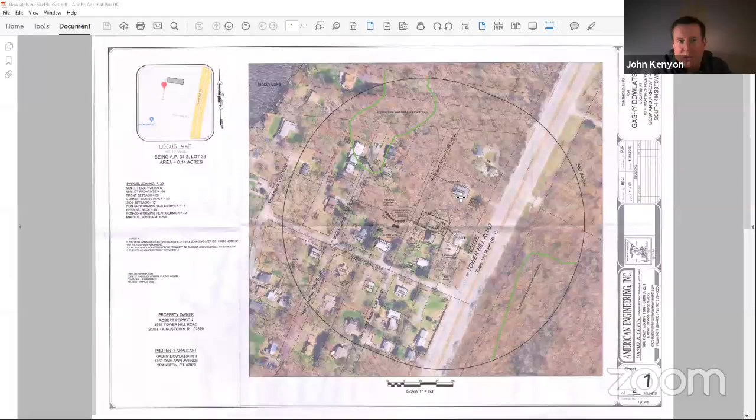The applicant's property is located on Bow and Arrow Trail North, designated as Tax Assessors Plat 34-2, Lot 33. The property is 6,050 square feet in size, and it's in the R20 zoning district. The applicant is proposing a 2-bedroom, single-family residence with an 896 square foot footprint. The proposed house meets all setback requirements and no dimensional relief is required. The house will be serviced by a proposed OWTS that has been approved by RIDEM. There are no wetlands on the property, but some are located to the northwest of the lot. The wetlands have been flagged by NRS, and the proposed OWTS will be located to the rear of the property, approximately 115 feet from the wetland edge.

We're here tonight for a recommendation under section 504.1 of the zoning ordinance, as the OWTS is within 150 feet of the wetland and requires a special use permit. The proposal meets all requirements under section 504, including the lot coverage requirement of 15%, and the drainage has been designed for the 25-year storm. Patrick Freeman from American Engineering is here tonight. He prepared the plans, and I'm going to have him go over the existing conditions and the proposed OWTS.

Thank you, John. Mr. Freeman is just coming in.

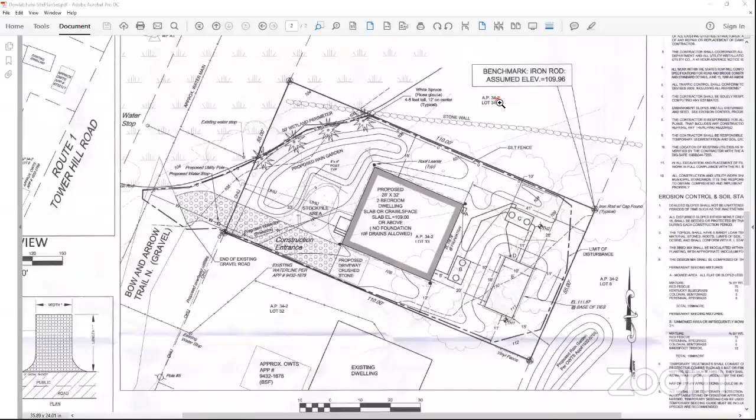Speaking of the trail again, I would mention that the existing water stop that you can't use is because it's a private road and they would have had to get a permit signed by the owner of the road in order to dig in that area. So I believe that's why you had to move your water stop. Is that correct? No, that's part of the reason. Being in the wetlands is also a factor, connecting to that would have been an encroachment into that 50-foot perimeter. Yeah, so it's also back on that.

It's also our understanding that the rain garden, although it needs to be planted according to spec, there's no requirement to maintain it, other than the honor system to maintain its health and to see that it continues to function down the road. So that's a concern, but it's apparently nothing that we can do about it or suggest be done about it.

So let me see. The driveway, it says the construction entrance, there's something in the plan that says the length of the construction entrance is governed by soil type, whether it's 50 or 100 feet long. Could somebody explain what that means?

That basically it prevents tracking of dirt or soil onto bow and arrow trail. What it's basically implying is that certain soils track differently, so based on the soils found on site, if you need a longer distance to prevent transport of soils, then you put a longer construction entrance on there. With bow and arrow being a gravel road, it's not as critical because it's basically an extension of a construction entrance. It's a long gravel road, it's not going to show up with silts on pavement per se.

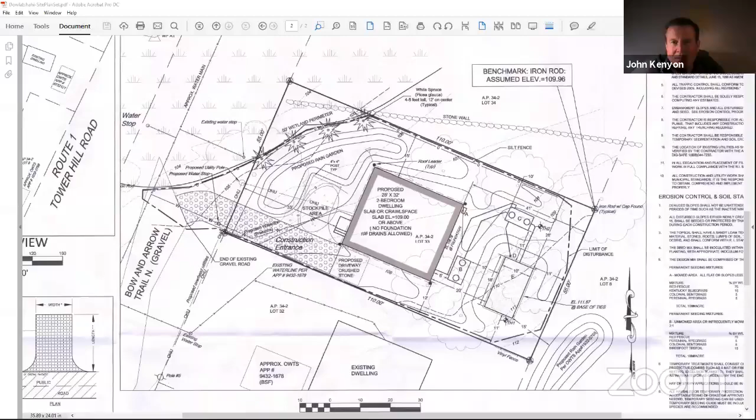The water stop? I'm sorry? Even though it's flooded to the water stop? Well, I'm not sure which water stop we're talking about, the one in the 50-foot perimeter wetland or the one in front of the Bissett's lot. I'd have to double check, I don't have an answer for that. The only thing that we could do is improve the gravel of Bow and Arrow Trail to meet a standard where it won't be a flooding hazard.

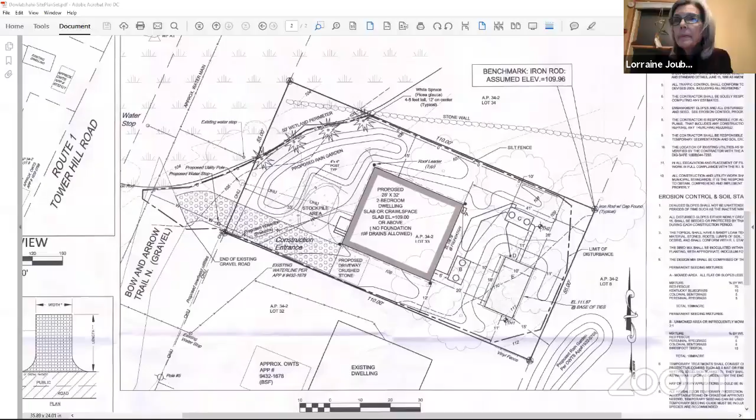Any thoughts? Yeah, John and Jane, does the existing gravel end perpendicularly to the road, or is it almost a diagonal?

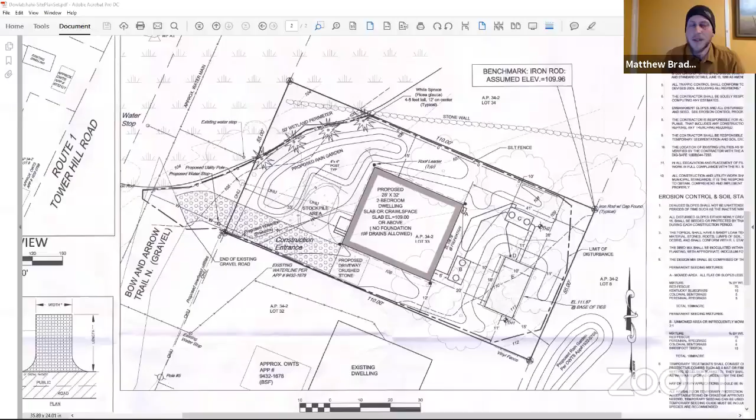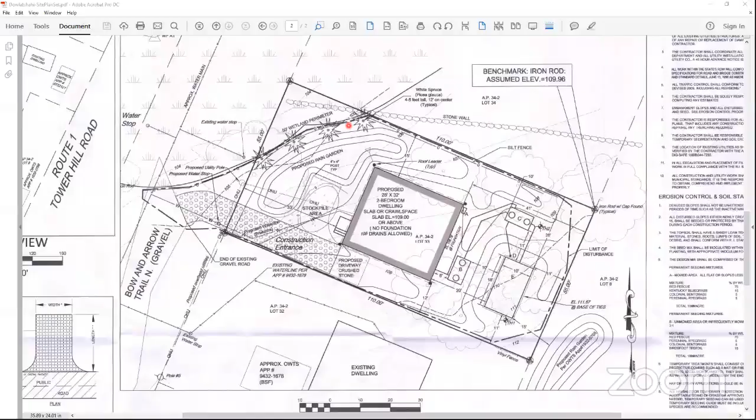It is kind of a diagonal at the water stop. I did send in a couple of pictures to Mr. Parker, titled flooding 1 and flooding 2 or something, for Bow and Arrow Trail North. It pretty much shows what happens.

That's where everybody gets stuck. One fella came down with a box truck because he was following his GPS. It reminded me of a Seinfeld episode—it told him to go straight into the swamp, and that's what he did.

Yeah, he had to be towed out. Like I said, the guy doing the surveying was parked right there and he had to be towed out too, and it wasn't even raining at the time. It just gets really soaked.

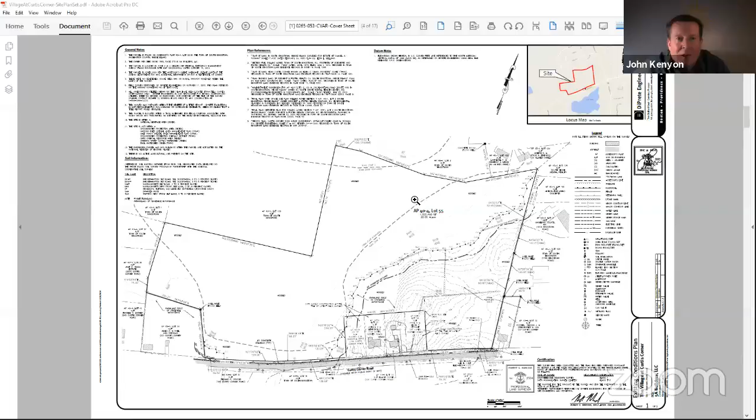The property is just under 30 acres in size, in an R20 zoning district. They filed a comprehensive permit application for the creation of 24 lots, containing 16 single-family dwellings and 8 two-family dwellings. There'd be one affordable unit in each of the 8 two-family dwellings. The concept is for a young couple with a family that could buy the two-family, live in one of the units, and rent the other as affordable.

We appeared before you last year during the master plan stage of review, and you didn't provide a recommendation because at the time you didn't feel there was sufficient information. We did receive master plan approval in March of last year. Under the subdivision process, after receiving master plan approval, we apply to the state for all necessary approvals, and then we have a preliminary plan public hearing with the planning board. We've had one hearing so far.

They requested that we come back to you since we have more detailed engineering along with the landscaping plans. We've also filed for the necessary state approvals. We're very close to receiving those, and not much has changed as far as the design since the master plan.

Eric Prive from DiPrete Engineering is the project engineer. I'm going to have him briefly go over the existing conditions, the changes from the master plan, and where we are with the state permitting. Unfortunately, Eric has to be at another public hearing in another town, so he's going to talk really fast.

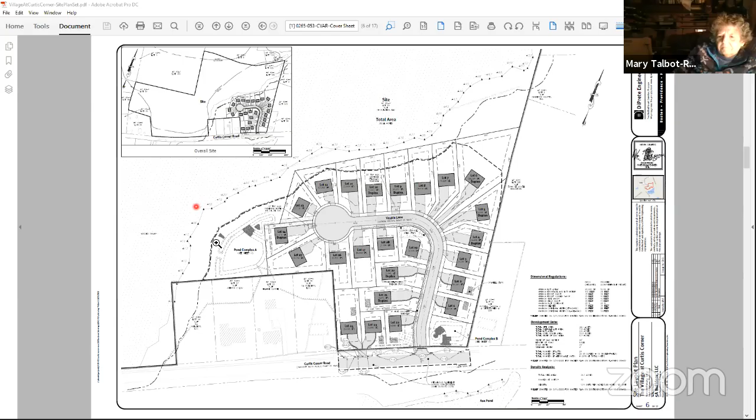I won't go too fast. First of all, can everybody hear me okay? Yep, thank you. Okay, thank you. For the record, Eric Prive, P-R-I-V as in Victor E, a registered professional engineer with DiPrete Engineering.

To give you a quick overview, actually not much has changed from master plan. One of the things we looked at during the public hearing process was an abutter located just to the east who had some concerns about drainage. So we increased this area in the front from the original master plan, which had a smaller area coming to this front area for infiltrating groundwater.

So we were able to shift the units up a little bit, all up to the north here, and create a larger area up here to be able to treat that stormwater.

Also, there's an existing catch basin located right here in Curtis Corner Road, and that catch basin just goes to a flared end that comes into a roadside ditch, with no treatment currently. As part of our development, we take that roadside ditch, but now it overflows and comes in and gets treated within our water quality area. We have a sand filter located right here in the front—a stormwater sand filter, not the bottomless sand filter like the septic system, just the sand filter for stormwater in the front.

So we're actually treating a portion of the roadway that is not currently being treated today; it was just direct discharge into this roadside swale. We also added, because of the abutter's concerns, some dry wells and driveway trenches to really take away the stormwater in this front portion.

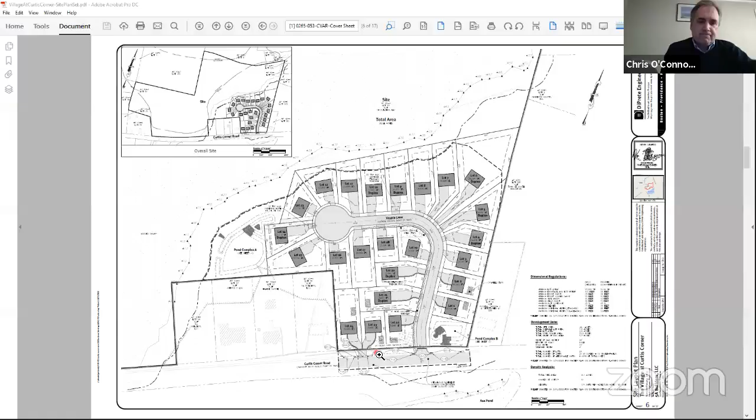Eric, is there a requirement for protection of upland open space in this zoning district? It seems awfully dense for the amount of development on a relatively small area of suitable land. There is not, but because it is a comprehensive permit, we laid these out back at master plan—each lot size and the relief needed. We took the town's comprehensive plan and the underlying densities; this area is known as medium high density, which allows 4.35 per acre.

So that's effectively a 10,000 square foot lot. We took only the upland area, so there's 7.4 acres of upland, and that's what the density was driven off of, staying within the town's comprehensive plan and restructuring it for density purposes. There are some areas for stormwater measures, but we only used the upland area. That's not a requirement of the density, but that's what we used. It'd be difficult to build in the wetland.

My second thought is that there's no indication that any innovative low impact development is occurring in terms of design and the extent of pavement. The driveways are extremely wide. The guidelines are 9 feet wide with a broadening as you approach the house, not immediately. The cul-de-sac doesn't look like it's going to have vegetation in the middle, and that's a pretty large cul-de-sac, though it could be vegetated. There could be shared driveways, particularly lots 24 and 23, where for safety it narrows to one, but it's still two very large, very wide driveways. Lots 20 and 21, many of them, almost all, are excessively wide. There's little effort to reduce impervious cover.

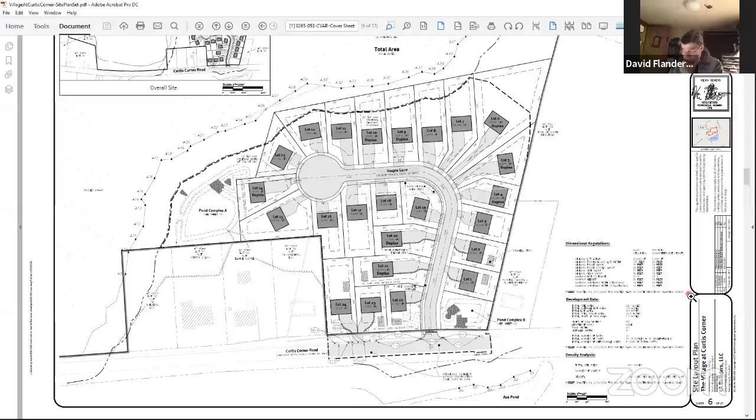So I can try to answer any non-engineering questions, and repeat what Eric said at the many hearings so far on this. Well, John - excuse me, sorry, Vern Wyman. I was just going to comment that the last time we reviewed this project, we were reflecting upon the combination of duplexes and single family occupancies here, and we were concerned with traffic.

I think since that time, from the records, there is a traffic report now. Could you comment on that and the results they got? Sure, Paul Bannon from Beta Engineering prepared and submitted a traffic report. It showed that it would not impact the level of service in the area.

At the last hearing with the planning board, they asked for an update concerning the light at Curtis Corner and 108, and he submitted that, showing it would not impact the level of service of the light there. The other thing the board was concerned about at the master plan hearing was the impact of the town potentially moving the high school to Curtis Corner Middle School, and that was taken into effect on the traffic. Good.

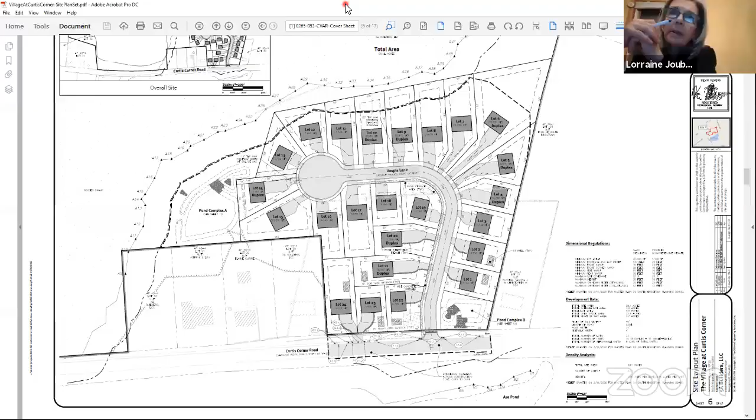Well, I would note that the concept behind this is close to the core of town - there are recreational areas you can walk to. I would agree if we were on the outskirts of town, on a larger parcel, but the town needs affordable housing, and this is one of the few lots in town that works for this type of development. There aren't many left like this. If we start reducing the number of lots, we're reducing the affordable housing, and that's the whole concept with this development.

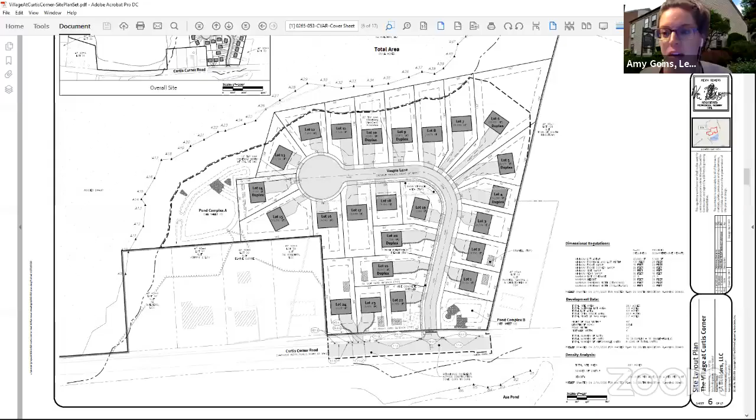This is Amy Goins, may I jump in? Sure. Hi everyone, I'm sorry I haven't met some of you in person - I think this is actually my first Conservation Commission meeting, so I've been listening. I just want to jump in on this question of density: this is an advisory opinion to the planning board, we're at the preliminary plan stage now - that means they're vested for density, right? The density vesting occurs at the master plan stage.

Doesn't mean it's set in stone forever, but it means that the approved density is what will govern going forward, unless the engineering produced at the subsequent plan review stage shows that the land can't support the approved density.

So I would encourage you in your discussion and your recommendation to the planning board to consider that. And if you have recommendations on conditions that will mitigate the impact of the approved vested density, you should certainly feel free to propose those. But I want to caution you against that, and I've provided this advice to the planning board as well. You know, master plan density, that ship has sailed for the most part. Thank you.

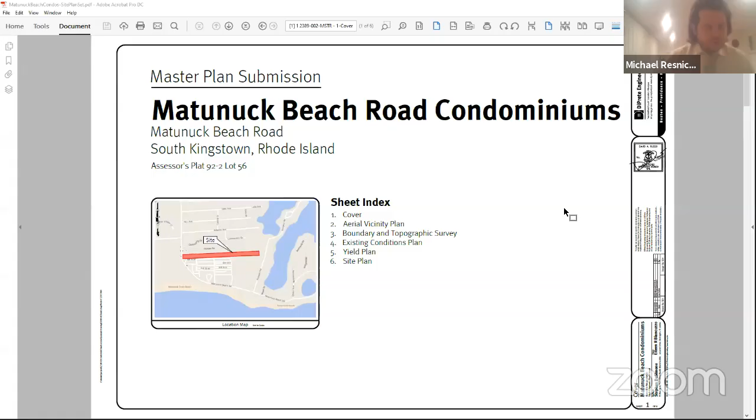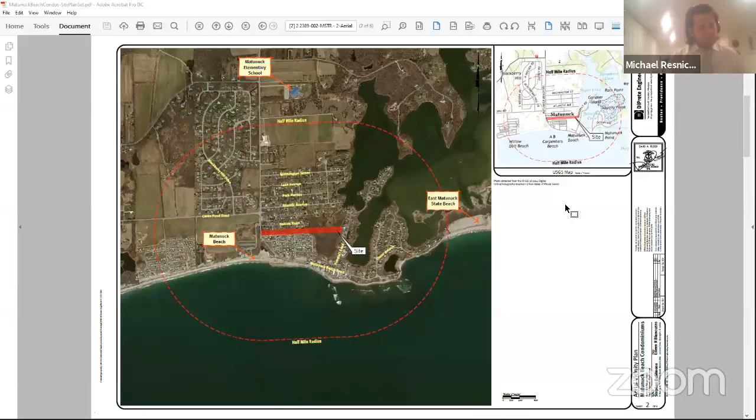The property is located at Matunuck Beach Road, plat 92-2, lot 56. The parcel is 4.77 acres, and it's in a mixed zone, CN and R20. By way of background, we have completed our pre-application concept review before the Planning Board and the Tech Review Committee, and we are presently before the Planning Board on our conceptual master plan review.

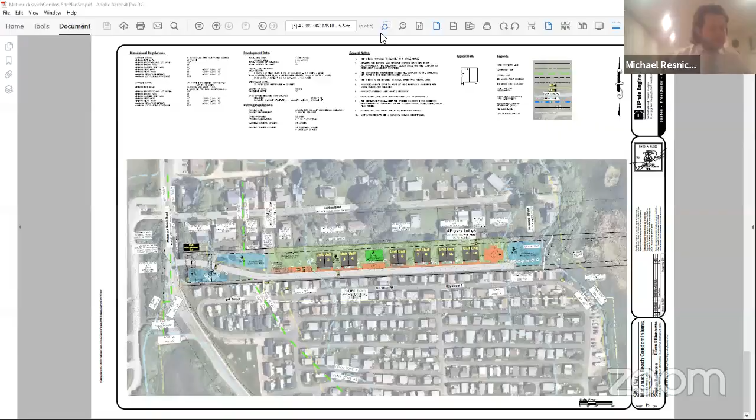We have had two lengthy hearings before the board on this present application. I would estimate anywhere between 7 to 8 hours of public comment, question and answering, and presentation before the board. We are presently scheduled for a meeting before the planning board on January 7th of this week.

As the commission is aware, we still have before us our application for a preliminary plan and also final plan. I would remind the commission that, like the previous applicant and presentation, this is a comprehensive permit pursuant to state law for low-to-moderate income housing. The proposal right now is a 12-unit residential condominium complex in the form of 6 duplex structures, as depicted on the site plan in front of you. Access is proposed via private driveway, with the parcel's lot frontage located on Matunuck Beach Road.

As Mr. Duhamel will discuss with you, we've proposed to manage the stormwater through the installation of various features on the eastern and western portion of the site. The development is proposed to be serviced by public water, and originally it was to be a single community on-site wastewater treatment system to serve these 12 units. However, based on commentary from the planning board as well as the public, that's been changed to 6 units, one unit to serve each of the structures. Again, this is a comprehensive permit application, so 25% of these units, 3 units, will be deed restricted as low-to-moderate income housing.

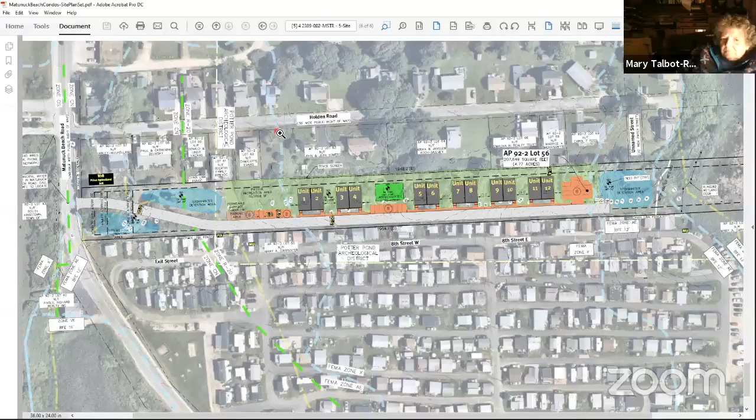We've been successful with pervious pavement in commercial and residential applications. In this coastal application, we were concerned with sand flies everywhere, so you would have much more maintenance of sweeping, vacuuming the sand. That's why we felt an impervious road as opposed to open concrete pavers would be the best use within this area.

Having a full gravel road might - I think it's more maintenance, it's more difficult to maneuver in. It's only 20 feet wide, so having full access of that 20 feet is more guaranteed with an impervious road, impervious pavement. Impervious - well yeah, it's overall impervious. I don't know if I answered your question. I'm not sure. Thank you.

Are there any particular restrictions with it being in the Potter Pond Archaeological District? Does that impose any limitations on your development? We submitted to Rhode Island HPHC, Historic Preservation, and they found no historic reason to prohibit construction.

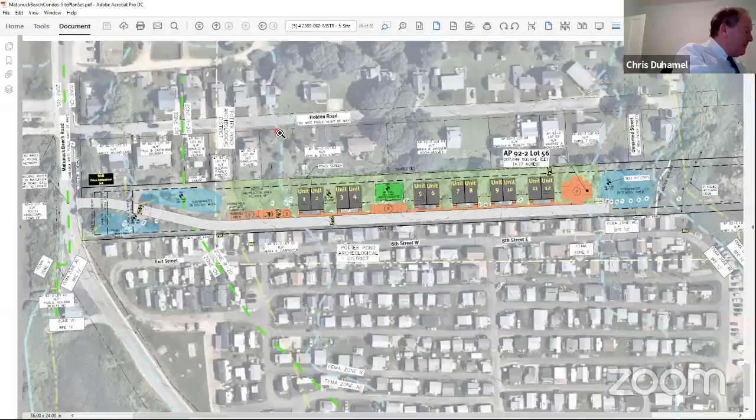With that, it's more conducive to an individual sewage disposal system. It's a condominium, an association - it would still have one entity responsible for oversight and maintenance of all the units, even though there'll be 6 instead of 1. So that high level of scrutiny will still exist, but it allows for having about 100 feet less road and the parking reconfigured. So it's a greater separation to the wetlands, less disturbance. And it meets a concern raised by the planning board - what happens if one system were to fail? We'll have limited that.

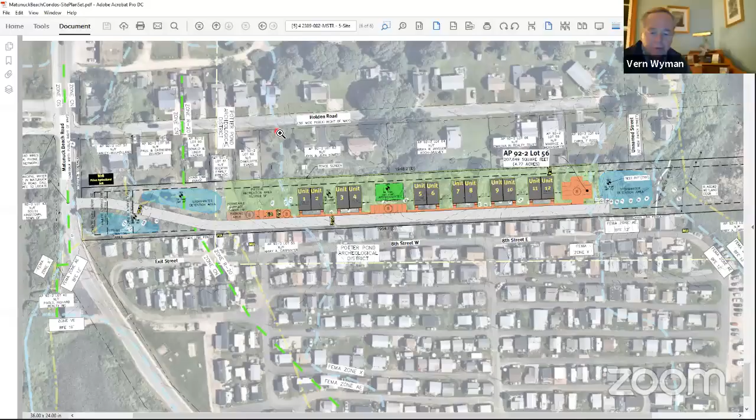Would it also modestly limit the proximity of the outermost units to that flood margin that's showing there? Well, we're pulling it away from the east side. A better separation - so certainly within that area, yes.

Jay, is there anybody else present with a hand raised? No, there is currently one attendee, Tori DeSimone. Tori, if you have anything you would like to share or say, please raise your hand. We'll allow you to speak.

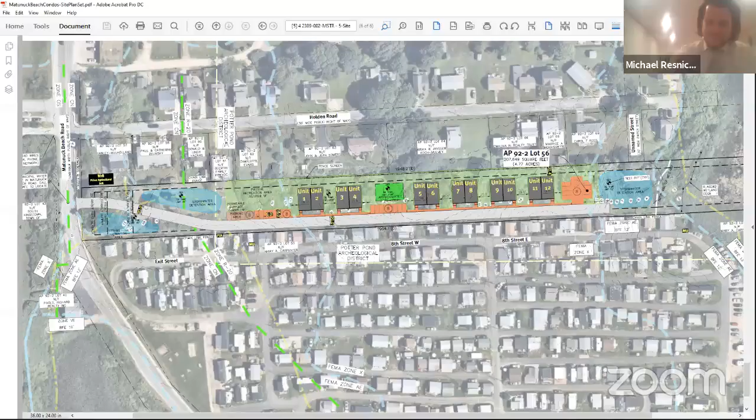I think that's Steve DeSimone. I believe that's Stephen, yeah. But Stephen was logged in already. Okay, yeah, Stephen's logged in. I am logged in. That's my mother.

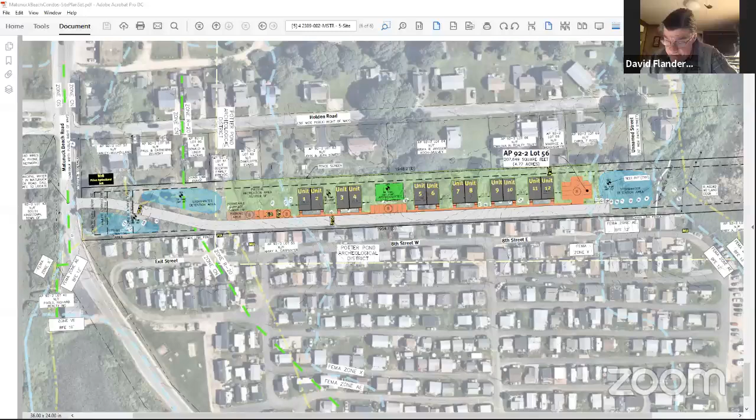So no, I do not believe there's anyone else in the public that wishes to speak at this time. Does anybody else on the commission have any further questions with the applicant?

If not, I'd entertain a motion for the recommendation to the planning board. I'll make a motion for a recommendation. It appears that the applicant has taken into account the planning board's concerns and reconfigured the subdivision to address those issues, including using 2 separate OWTS drain fields rather than one - pardon me, 6 of them, one for every 2 units. Although we really don't know the exact placement yet.

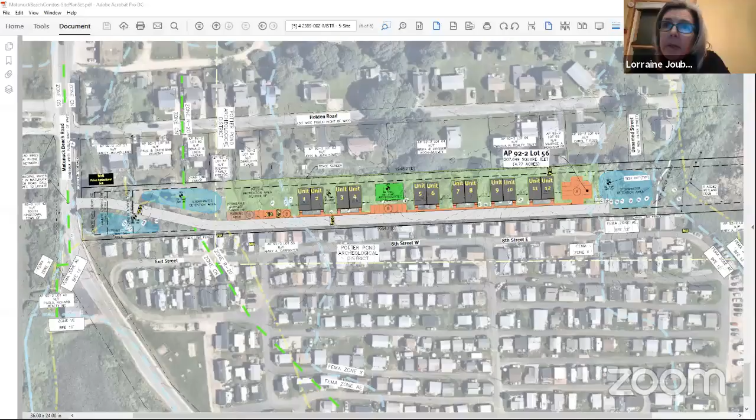In terms of stormwater management, given the permeable soils, there are no issues with infiltrating most of the runoff. The primary concern appears to be potential flooding, with more frequent and more severe floods, especially in terms of leaving the site in an emergency. So it would be useful if the applicant could evaluate the scenarios developed in different mapping programs out there to evaluate what the future flooding could be over the next 30 years at least.

Lorraine has made a motion. Do I hear a second? I'll second that motion. Vern Wyman has seconded. Any final discussion before we vote? Okay, I'd ask that everybody in favor say aye. Aye. Aye. Aye. Any opposed? The motion passes. Thanks very much.